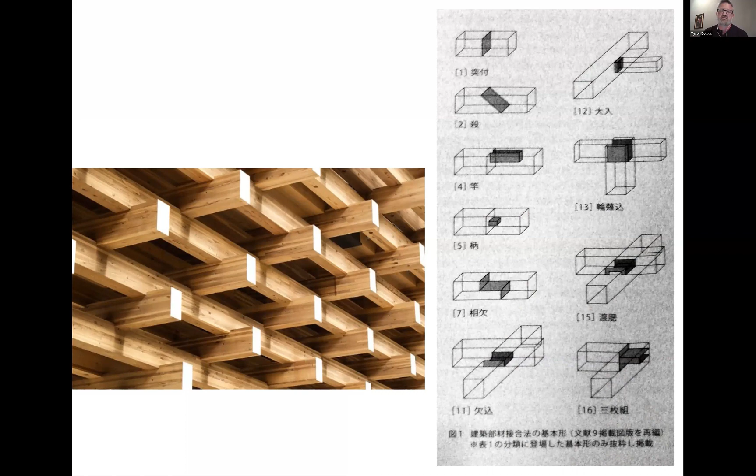So take wood, for example. Everyone's familiar with wood. Everyone's seen a house being framed. So everyone, I think, is familiar with how wood is used in architecture. But wood is also a deeply expressive material. And you can just take the fact that there's an inordinate number of ways you can join two pieces of wood together to create a structural connection for a different purpose, to start to tell a story about how it gets used to create something that's very expressive and experiential. This is a museum project.

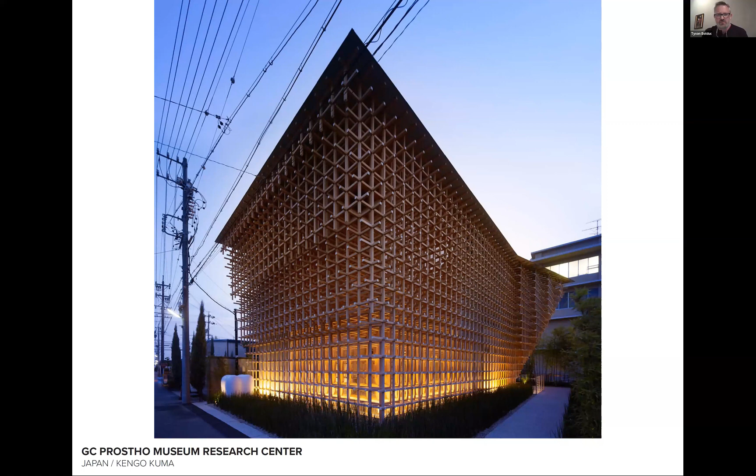The architect actually was inspired by a Japanese toy called Cidori. Some people might be familiar with it. I wasn't when I was looking at some of these projects, and I'm probably not even pronouncing it correctly. But basically, it's a toy that involves matchstick pieces of wood that are notched, so that when you put three of them together and twist the last one, it locks everything into place and creates this three-dimensional joint. And you can keep doing that in an additive way.

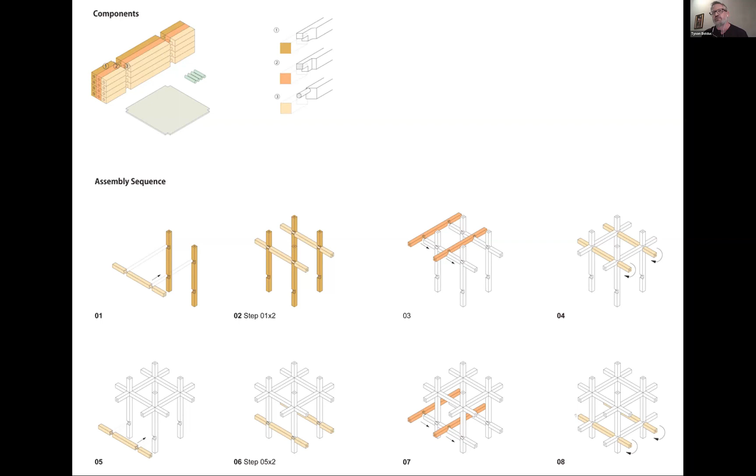And the architect asked the fundamental question: is this something that can be scaled up and used to create a building? And obviously the answer was yes, and used it to create a very experiential space, a space that is very evocative of something that's important to Japanese culture, that being the use of wood in building, and how that folds into all aspects of Japanese life, and to create these very emotive spaces in a museum. This I've always felt to be a very emotive project.

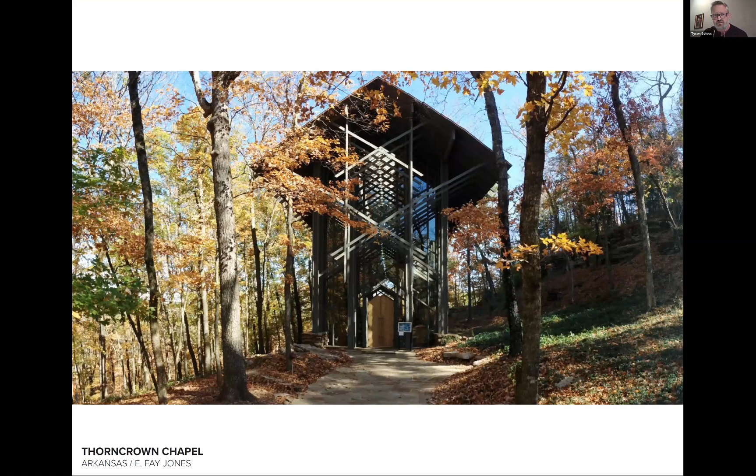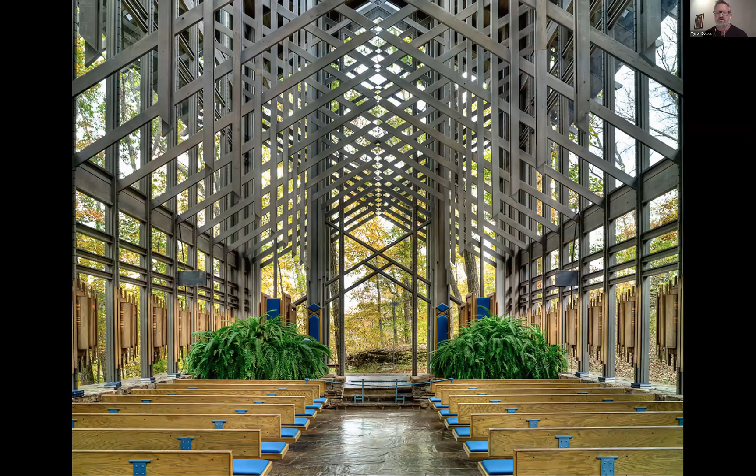This is a chapel in Arkansas, clearly inspired by medieval European Gothic chapel architecture, but wood is used in a way to create something completely new. So using old forms and an old way of organizing space, wood is used to create a space that is all about light and all about the experience of nature and its surroundings. This is something you couldn't actually do with stone, of course, being the traditional medium of a Gothic cathedral, say. So turning that whole idea on its head.

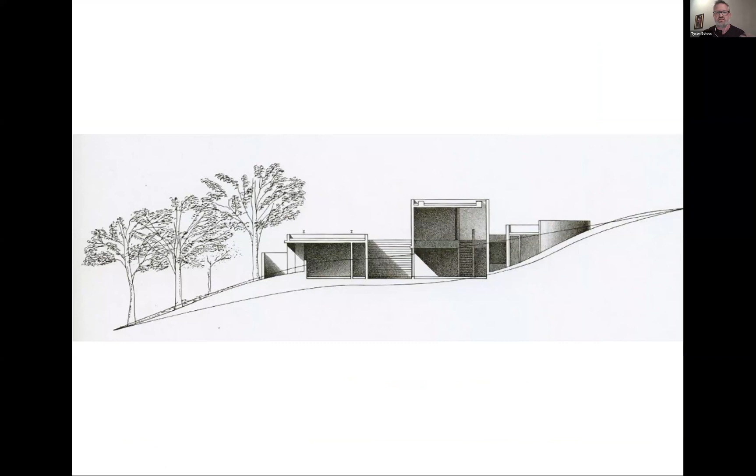Here's a house in Japan that is using a heavier material, a more austere, weighty material. It's built into the earth, and the concrete is fundamentally where the building is built into the earth. And this is all about contrast. So this is about taking a really heavy, beautiful, but austere and a little bit cold form, and juxtaposing it against these openings and a very curated experience around how light comes into the space and where light is sort of allowed into the space.

And it's done in a very sort of serene and austere way, and very calculated. Everything about this project is very calculated. But then you take the work of an architect like Luis Barragan, a Mexican architect, who essentially uses the same material palette as the project we were just looking at, but uses it in a completely different way.

Architects can also use structure and the tools of building to create things that seem like they shouldn't be possible. And of course, Apple does things like this all the time. This is the Steve Jobs Theater as part of the Apple campus. This space actually feels like it shouldn't work. It's a carbon fiber roof, so obviously it's very lightweight, and engineered in such a way that it takes advantage of some uplift as well, but it's just bearing on glass.

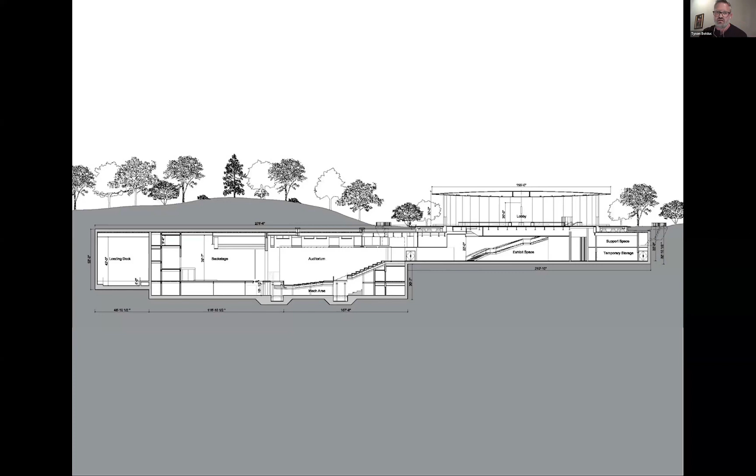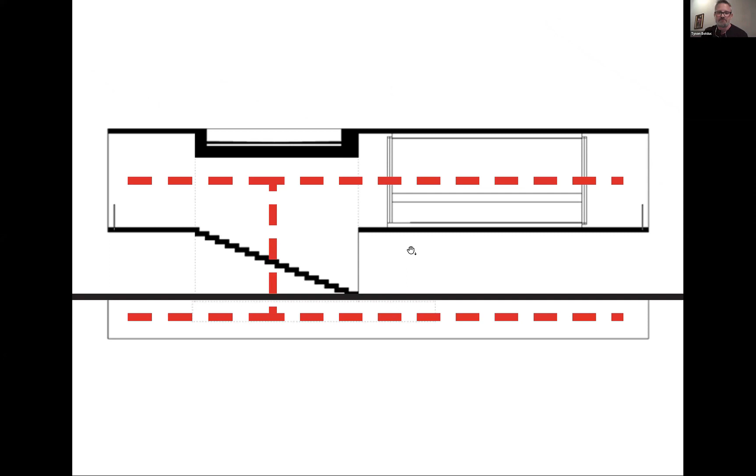You could take something like the humble arch. Everybody, I think, is aware of the significance of arches and its structural performance. The Romans obviously knew this and were able to create monumental buildings with probably, I'm guessing, a fairly rudimentary understanding of the forces and the physics. Maybe that's not fair to the Romans, but they made it work probably through a lot of trial and error.

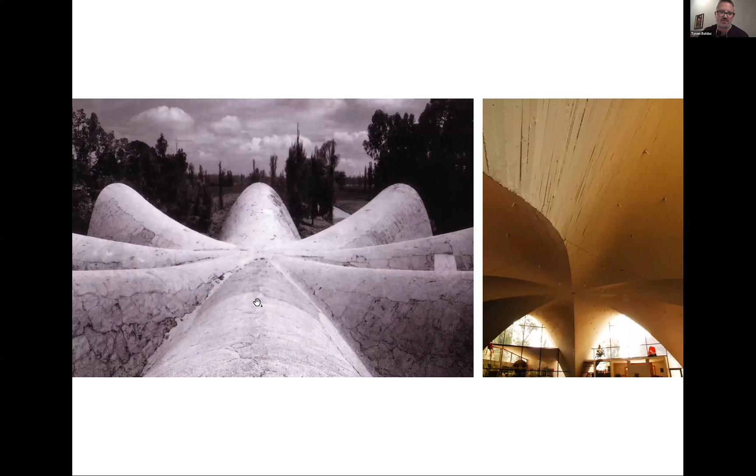And in fact, what Candela has done with this project, and this is a similar project, but it's essentially the same, is curved it in both directions. So it creates a shape called a hyperbolic paraboloid. You can look that up later, but it's essentially curved in multiple directions. In this case, it's curved this way, and it's curved the opposite direction this way. You can kind of get a better sense of it here. And so this is taking the idea of an arch, a very classical, very ancient way of building, and turning it on its head to create something completely new and a new kind of experience.

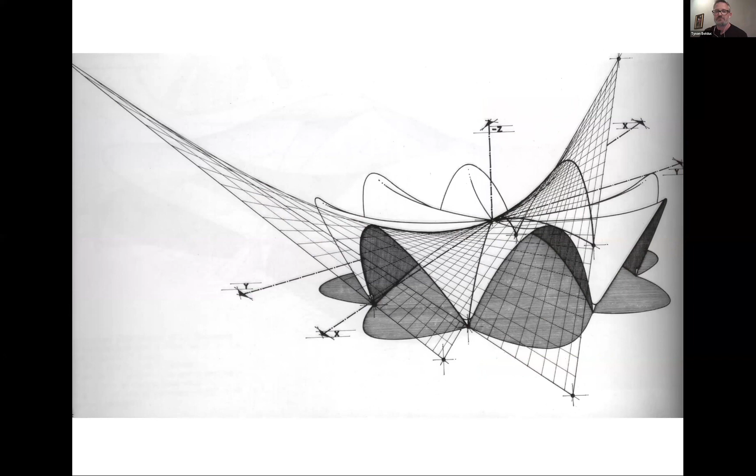And I'm just going to finish here, I think probably getting close to my 10 minutes. Finish here with a project from our own practice that looks at this, and in being a little bit more familiar with it and some of the practical necessities that we had to deal with, I can explain that a little bit as well.

So this is a YMCA rec center in Calgary, and the idea here was to create a building that was very evocative and complementary to its landscape, which in this case is an urban edge condition kind of in the foothills of Alberta. And so the building tried to take advantage of that motif and create something that was very undulating like a hill.

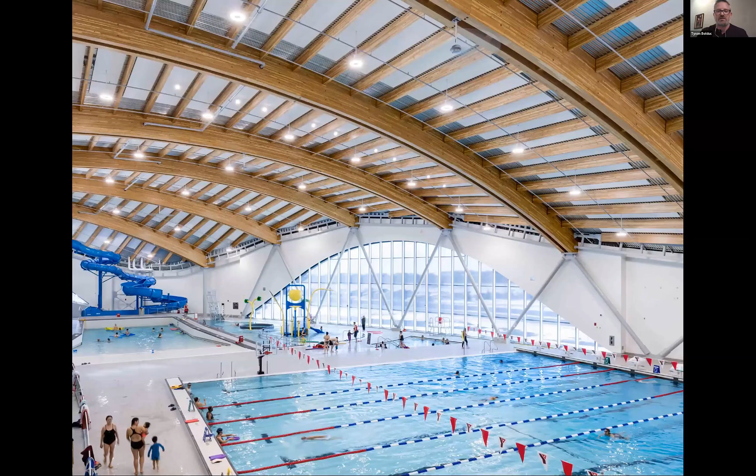And I think the reaction that a lot of people had when they first saw this, when it was in concept and before it was built, was like, that looks really expensive. That looks like something that we wouldn't think of the city of Calgary as funding. That it's something that maybe is not being altogether responsible with taxpayer dollars or something of that nature. The kinds of comments you usually get. And in fact, that isn't the case at all. And we worked really hard to find ways to make a form like this economical.

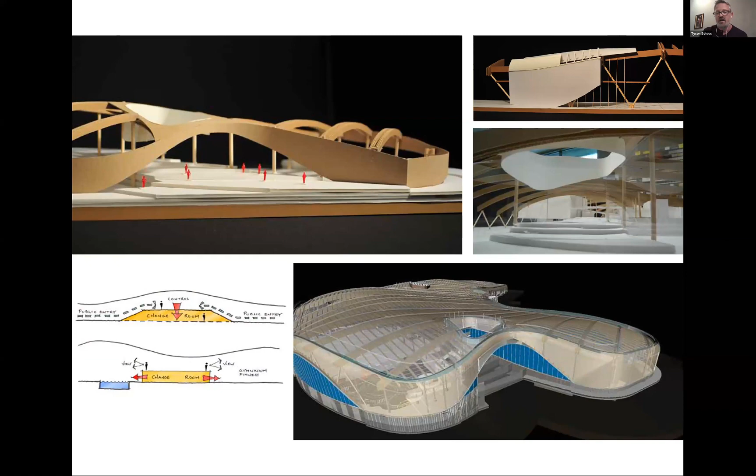And the way we did it, ultimately, at the end of the day, we used a lot of physical modeling. We used a lot of sort of manual tools, but we also really exploited digital tools and digital modeling and building information modeling and actually ultimately parametric modeling, where we could actually design using a specific set of parameters to create a highly efficient form that relied on essentially one shape.

So at the end of the day, it's this very undulating, very kind of almost random appearance, but it's all created from the same hockey stick shape here that you see at the bottom. And simply by cutting the wood structure to different lengths and using different lengths of wood, but bending it along the same curve. And if anybody has any understanding of how wood structures are manufactured, they use jigs and molds essentially to create the curves. And if you're doing a unique mold or unique jig for every structural member in the project, that's going to make for a very expensive building.

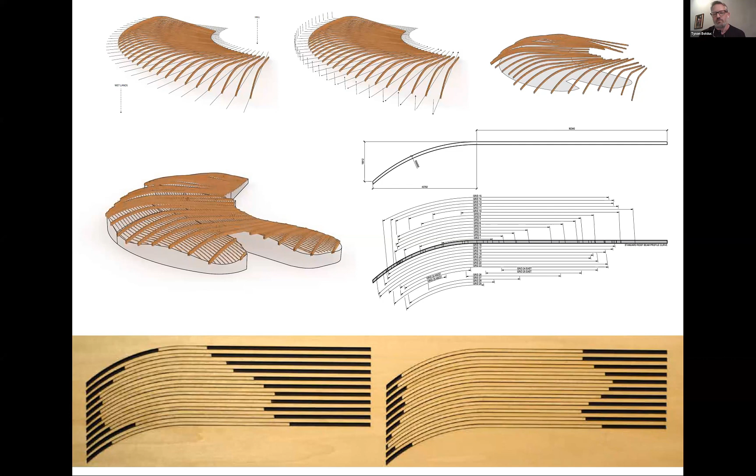And so using technology and using tools to create an urban form that was important to us and important to the story we were trying to tell, and then leveraging technology to make it cost effective. So that's just an example to end on from our own practice and give you a bit of a sense of how the marriage and the melding of the science of building and the experience of architecture and spaces in our built environment come together.